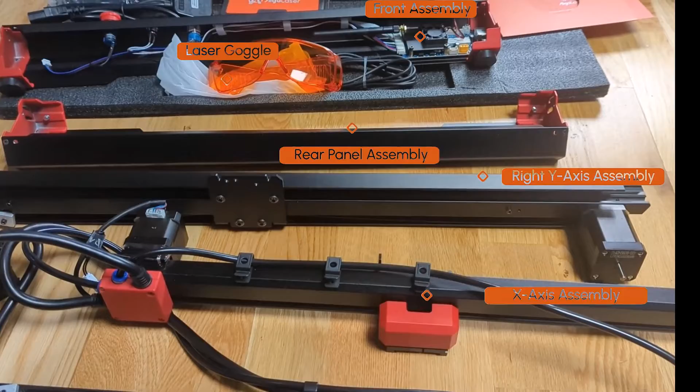And if I put all of the parts onto the floor, we can see exactly what was in the box here. We assemble the X and Y axis, the front and rear assembly to make our frame. There's some safety glasses that come with it there, the toolbox. And if we quickly stop here a moment, you can see the Wi-Fi aerial on the front assembly. That allows us to connect to the laser cutter by a smartphone. But more about the Wi-Fi connectivity later on.

And you can see an air pump there, that's because the laser cutter comes with air assist, which is a really good feature. We'll be looking at that later. We get given a pack of consumables, which give us something to get started using with the laser cutter. And last but not least, there's a good user manual.

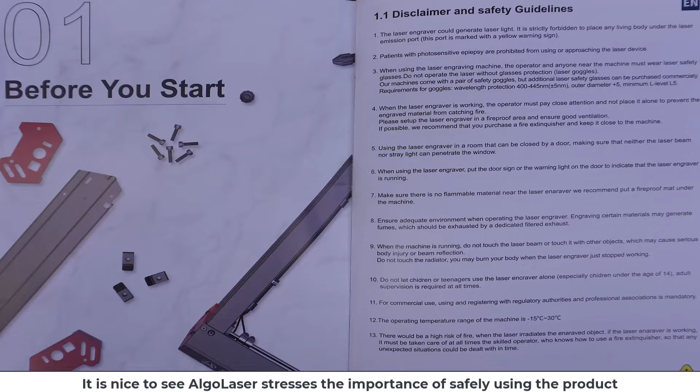And looking in the quick user guide, it's really nice to see that AlgoLaser has a really big emphasis on safety. I think this is really a responsible thing to do because apparently many companies, they just don't really care about safety. In fact, Maker's Muse made a video about it about a year ago, I think. I'll put a link in the description to that. But the gist of it is some companies are very irresponsible.

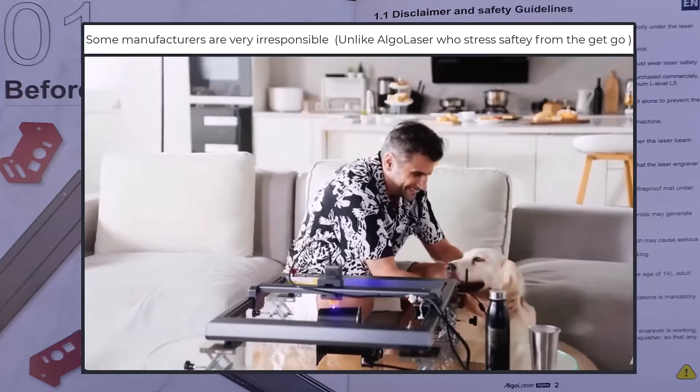For instance, I'm not sure which company this advert's from, but a snippet of it, we can see a dog right next to the laser cutter and the guy using it in his front room. And when we look at the AlgoLaser safety list here, we're going to see that's absolutely crazy.

So the first thing we see here in the safety guidelines is obviously not to have anything living underneath the laser. That goes without saying. But thinking about the video we just saw with the dog in the same room right next to the laser, should the laser beam be reflected off anything, well, it could actually hit anything in that room, including the man and his dog. Next safety point is people with photosensitive epilepsy.

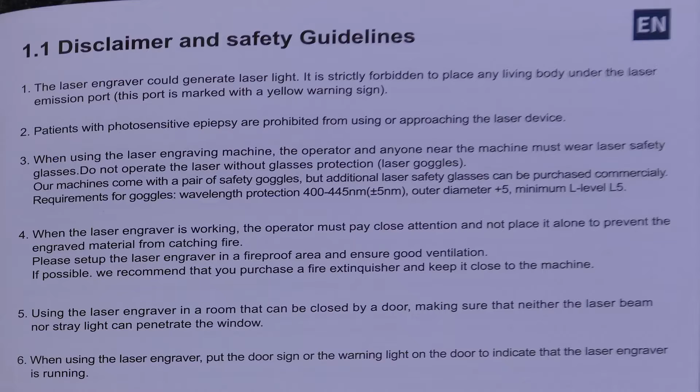The flashing lights could trigger a seizure, so they shouldn't use this laser cutter. And next, whenever you're looking at the actual laser cutter while it's working, you should always wear safety glasses. And the Alpha from AlgoLaser, it comes with its own set of laser safety glasses. But it's a really nice touch that they actually say the wavelength that you need to protect your eyes from in case you want to buy your own safety glasses, so you can be 100% sure that you're using glasses that are going to protect your eyes.

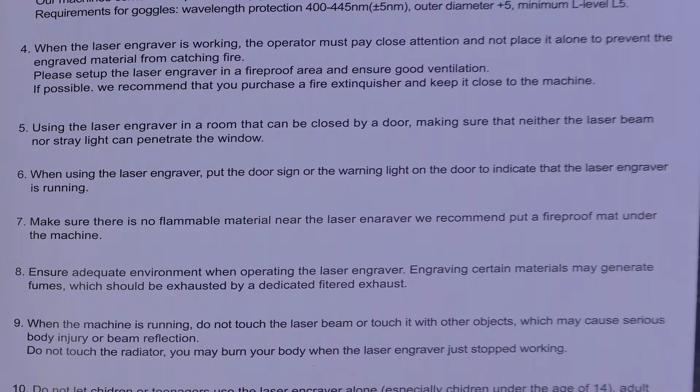Because without using glasses, should the laser go in your eye, even if it's just refracting off something or it reflects off something, well, you could pretty much instantly blind yourself. It can burn your retina out. So it's really, really important.

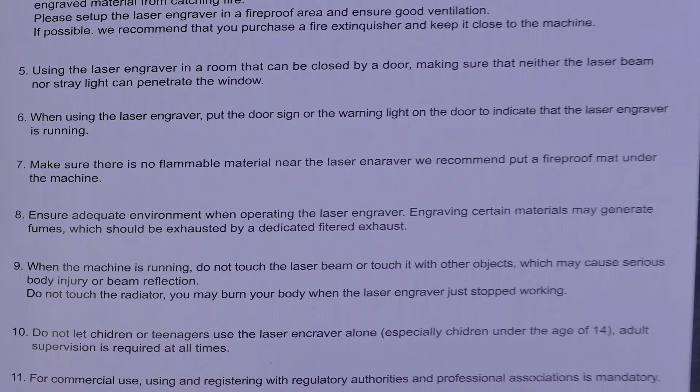Please protect your eyes. We can see here there's multiple warnings about fire hazards. You've got to be really careful about when you're laser cutting that things don't catch fire. You might be laser cutting wood, cardboard, anything really, so there's always a risk of fire. One thing the company recommend here is putting a fireproof mat under the machine.

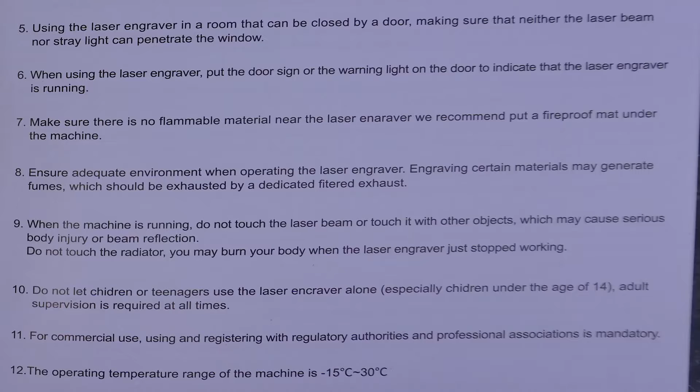That's something I'm going to be doing later, and maybe keeping a fire extinguisher nearby just in case. Because I found out it is actually pretty easy, if you're careless, to catch something on fire. I caught a piece of wood on fire by doing something a bit silly, which you'll see later on in the video.

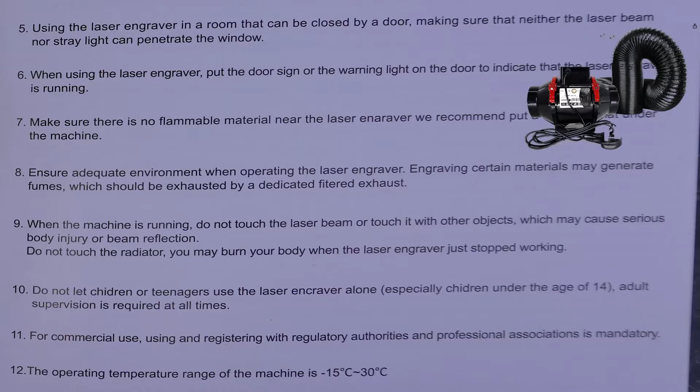Now as well, when you're cutting or engraving things, it's going to make fumes, and you really don't want to be breathing these in. So it's important to be using it in a well ventilated area. It's recommended that we should exhaust the fumes through a dedicated filtered exhaust. So that's something I'm going to be building before using the laser, because I really don't want to be breathing in any fumes, especially if they might be toxic.

Cutting wood and things like that is not going to be too bad, but some acrylics and fake leather, when you actually cut them, can give off toxic fumes. Apparently one such gas that can be given off cutting some things is called hydrogen chloride. Google it, it's really not nice if you're going to be breathing that in.

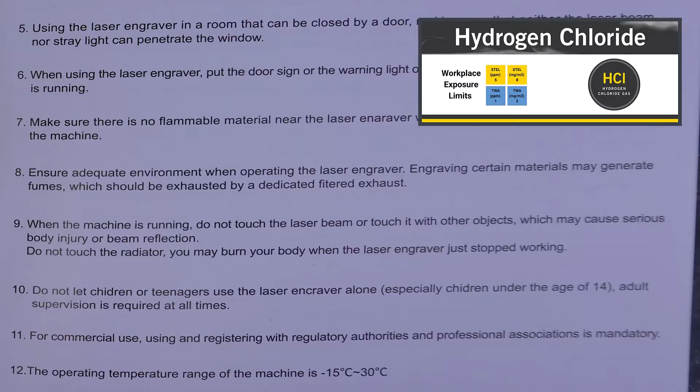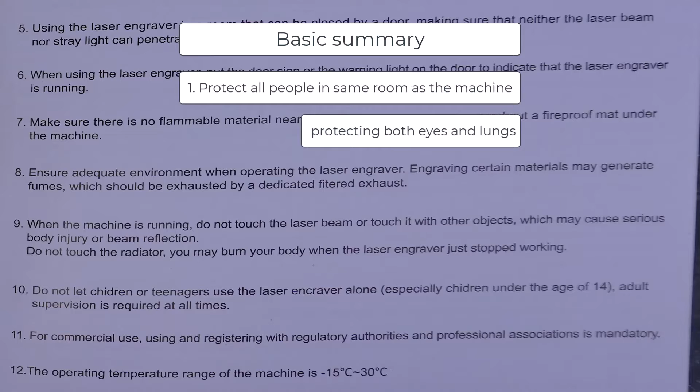So just to summarise the safety points: we need to protect both ourselves and anyone else who may come into the room, and that includes protecting our eyes and making sure we're not breathing in any fumes. And lastly, just making sure we're careful about cutting materials that may be able to catch fire.

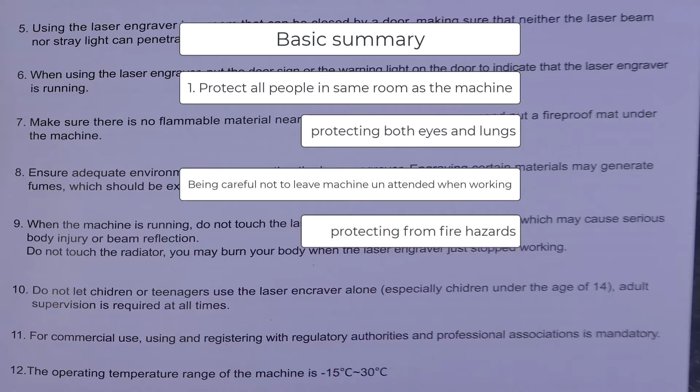We don't really want to be laser cutting and just leaving the machine unattended, but at the same time we don't want to be looking at the laser working all of the time either. So what I'm going to do is build an enclosure with a fireproof base, have an extraction system, and also rig up a small webcam and light so I can keep an eye on the laser cutter from my PC, without having to look at it directly.

So after I've built the laser cutter, which I'm going to do next, I'll then show you what I used and how I built my enclosure, all for about $150.

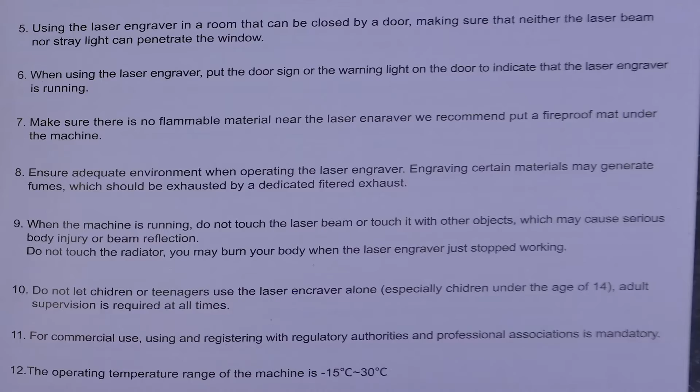Okay, so normally I don't really like putting things together, but this was actually remarkably easy. I just put all of the pieces on the table, and you can see I've got my laptop there too, because although the Alpha comes with a really clear instruction manual, I prefer to use AlgoLaser's video tutorial showing how to put it together.

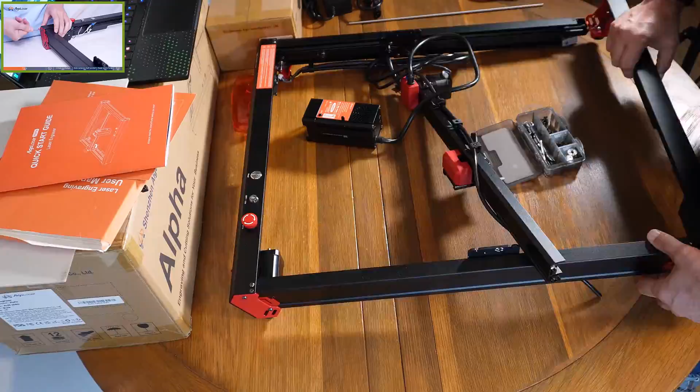Also, when building the machine, it comes with its own toolkit, so everything's included that you need to put this together. Like I said, it's remarkably easy to put together. You just basically bolt four sides together making a square, push a few little electrical socket connectors together, and connect the gantry, which is the part that the laser travels up and down on, across the frame.

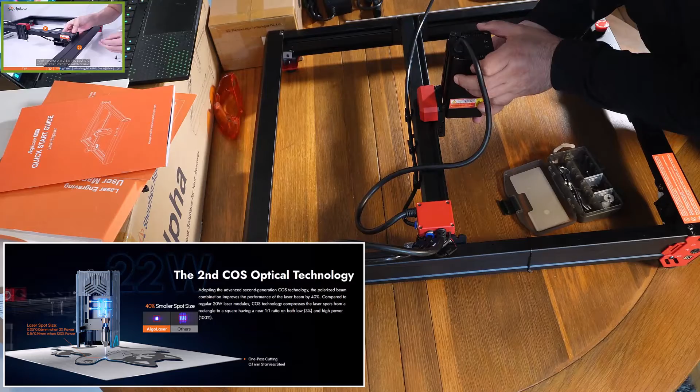Next, I'm installing the powerful 22 watt laser here, but it also has another trick up its sleeve, because the laser has a 40% smaller spot size, making it a perfect square 1:1 ratio, improving both power and cutting accuracy. And if you noticed, it was really easy when I fitted the laser in — I just slid it in and then locked it into place, but we'll be looking more at that later.

Up to this point the assembly had gone pretty well, but I'd made a mistake. I had the pipes on the inside of the frame instead of the outside, so I had to quickly undo a few bolts and adjust that.

So once I'd done that, everything else was pretty straightforward. You have to attach a metal bar going across which attaches to the motors, which moves the gantry up and down, so that's pretty straightforward.

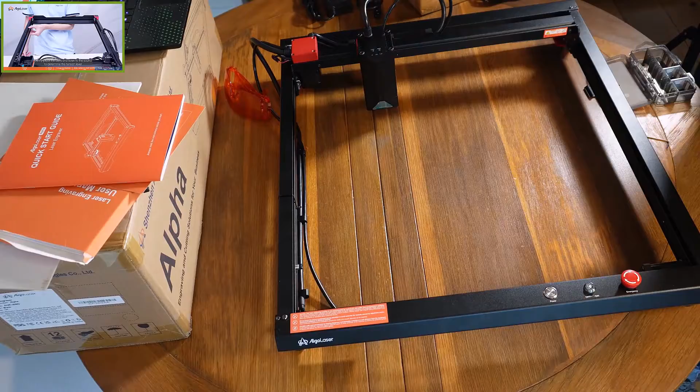So for me, the hardest part of assembling the machine was actually tightening the gantry belts. Either side there's a belt, and you have to tighten them exactly the same. The way they say you should do it is kind of twanging the belts, and both sounds on each side should sound the same — if not, you tighten one side and then the other till they both sound the same. But for me, I found this really difficult, though I'm not going to make you watch me struggling to do this.

It took me a little while, but eventually I got it right. So with that done, the machine's built.

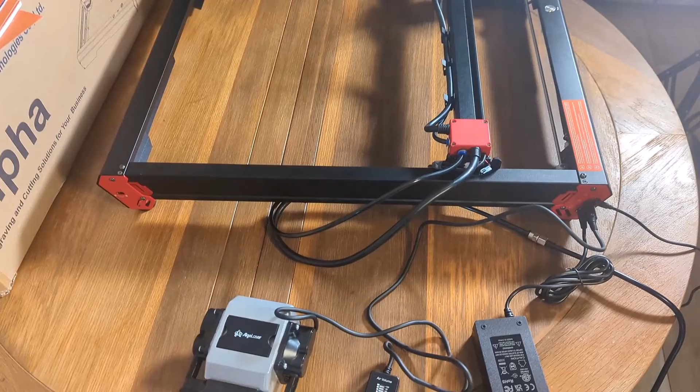The silver rectangular box on the left there, that's the air assist pump. It's nice because it doesn't need a separate power supply because it plugs into the frame and draws its power off there. At the side of the frame, at the top, that's the USB port that will connect to the PC. Underneath that is where the air assist draws power from the frame, and underneath that is where the main power supply that powers everything connects.

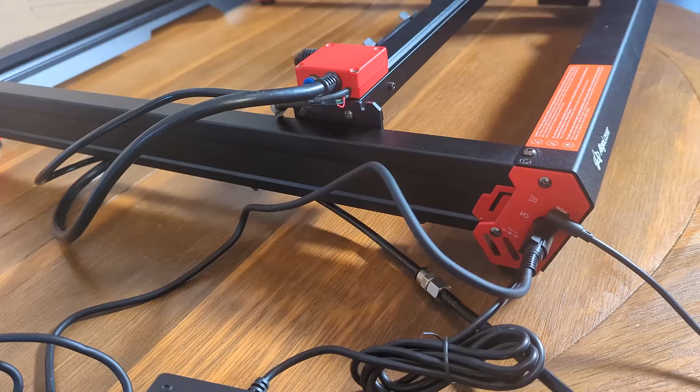Okay, so here's the finished product. There's everything put together. Now you can see I've put this on a piece of what's called cement board. This is totally fireproof, and what I'm going to do when I'm making my enclosure is cut this to size so the actual frame can sit on top of it.

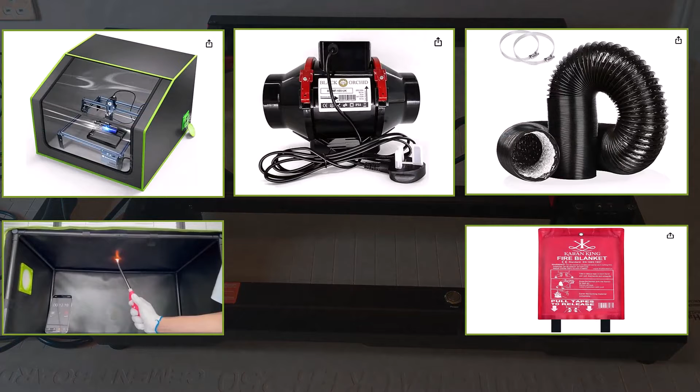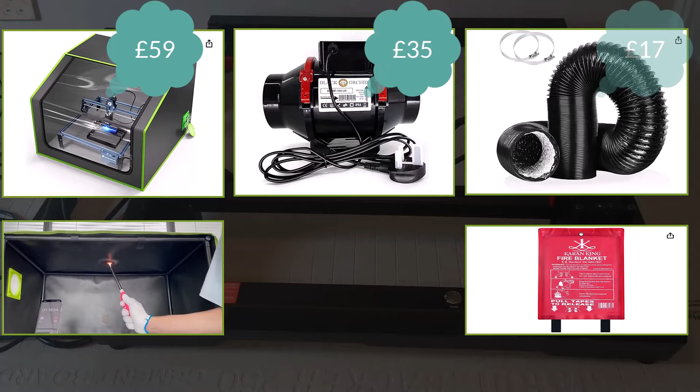So this is the equipment I bought to make sure I was doing my laser cutting safely. I bought a fireproof tent enclosure for laser cutters, which cost me £59. To extract the fumes from inside the tent, I bought a hydroponics fan for £35 and some 4-inch ducting, which was a further £17. Now I didn't buy a fire extinguisher, I bought this cheap £6 fire blanket instead.

So I assembled the frame of the tent, and then I cut 2 pieces of 5mm ply, just slightly bigger than the size of the frame. Next I drilled holes around the frame and cable tied it so it couldn't move, and also made a handle at the front with cable ties, which will make it easy to move the tent around by pulling it and sliding it along. Next I cut a piece of fireboard to the same size as the frame of the Alpha.

Next I needed to drill some holes in the side. This would allow me to put cables through and also allow airflow when the extraction's on. Now talking about extraction, if you don't want to have to put a pipe out the window, then you need a friend called Luke who's a builder, and ask him to cut a hole through the wall for you. Okay, so thank you Luke.

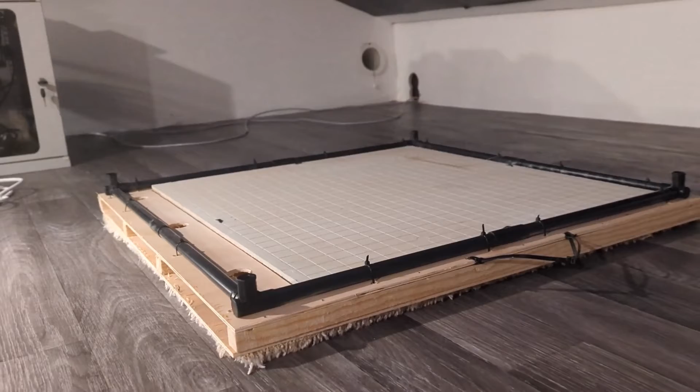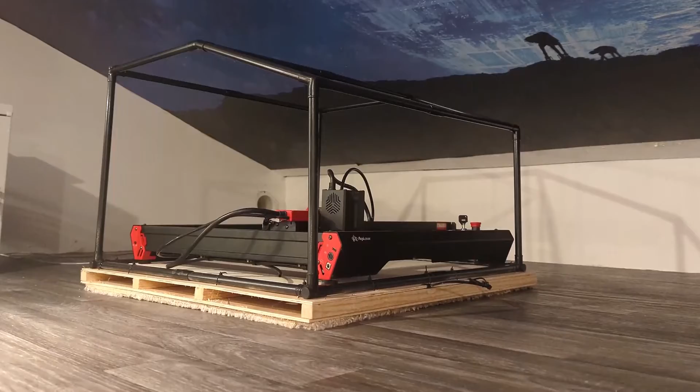So guys, you can see the extraction fan hole over in the corner there, and the base of the laser enclosure is finished now. You can see it's got the 2 pieces of wood with a gap in the middle. That means I can run cables underneath and don't have to have them go over the actual frame itself. So with the laser cutter back on and the tent frame rebuilt, you can see what this enclosure is going to look like. I stuck a piece of upside down carpet on the bottom to make it easy to pull around on the floor.

I needed to better monitor what's going on inside the enclosure when doing laser cutting. I already had a 1080p webcam lying around from a previous project, and I bought a USB ring light, and I thought if I can combine them together and stick it onto the frame, that's going to be the perfect solution. So I removed the base of the USB webcam and then stuck the webcam behind the actual ring light itself using a bit of hot glue.

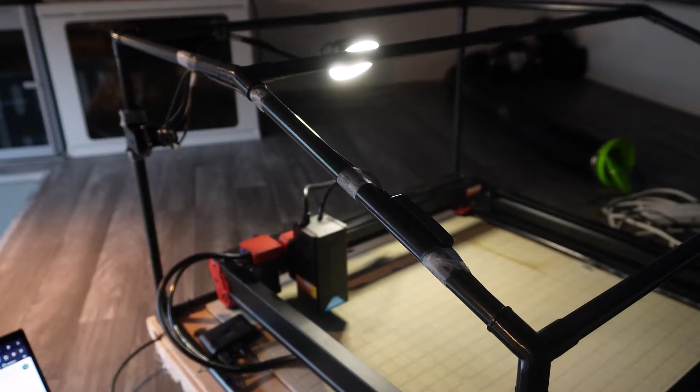Now I've finished making the camera and I've stuck it to the frame, and you can see the light shining down on the bed there. Now I'm testing it out here using Google Meet because that's the only way I could get the camera working on that laptop for some reason. And it's working absolutely fine.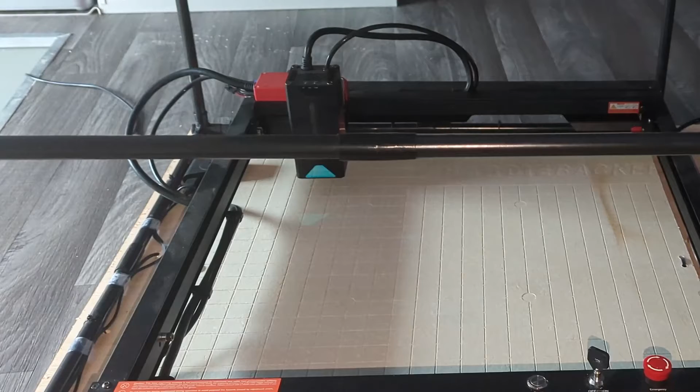Now you'll notice that everything's going into a USB hub. That way I can have the Alpha, the camera and the light all connected to the computer with just one cable. So that's the laser cutter enclosure all but finished. You can see on the back right hand side there's the air assist pump on its own little platform which is connected to the main platform.

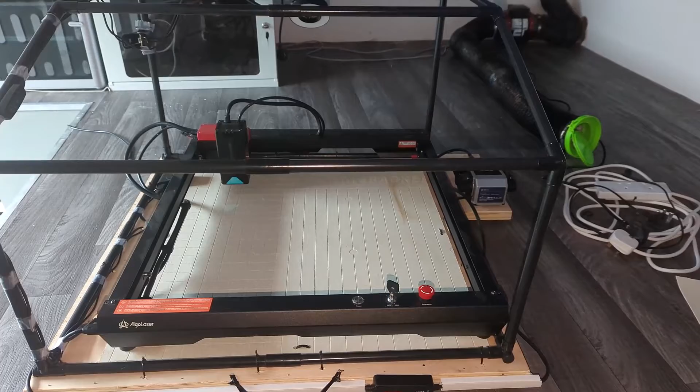So all I really need to do now is put the tent on and then connect that up to the extraction system. But before doing that, I want to show you some things that are going to be easier to show you without the tent on that I think make the Alpha a really cool laser cutter.

Now you probably realise, because I keep on going on about it a lot in the video, that I'm really impressed with the safety features of AlgoLaser, and we can see here the chrome looking power button, but next to that is a key which has to be in the on position in order for the laser to work.

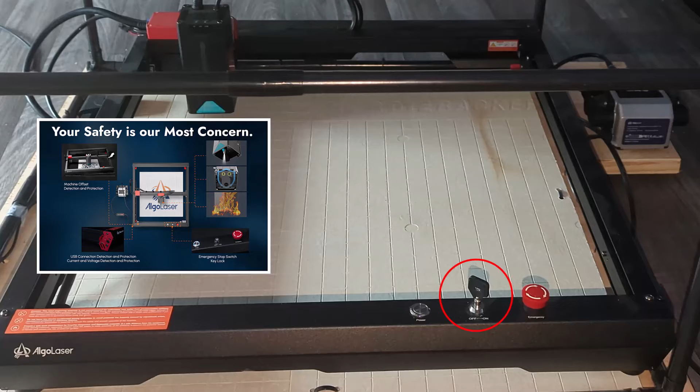So it's a nice feature that you can actually remove the key, so you can feel confident that no one who doesn't know what they're doing is going to use it if you're not there. And the button to the right of that red button is an emergency stop button. If you hit it, the whole machine stops, and to reset it you just turn it and it pops back up.

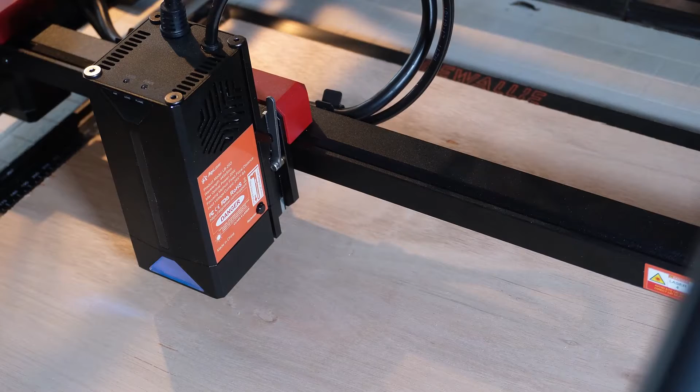Now I want to show you some really neat things about the Alpha's laser. The way you can adjust it is really cool. You just pull this little lever down and it moves up and down on like a track, and when you push the lever back up, it locks into place.

And this is cool, a removable magnetic laser shroud. It's a good safety feature and it's easy just to stick on.

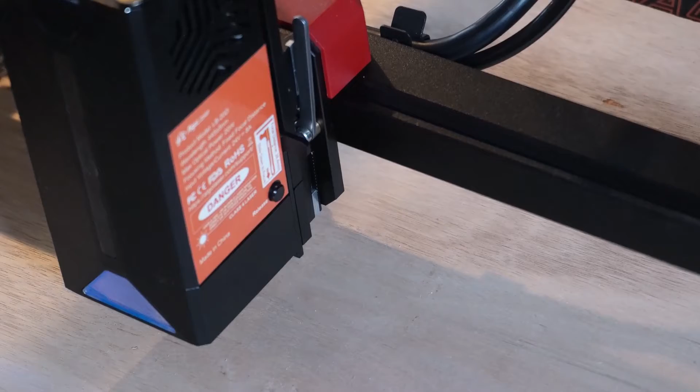When using a laser you have to focus it, getting the gap right between the actual laser and the material you're cutting. On the Alpha's laser there's a little black lever that pushes down and releases this little spike thing. We release the lever, which will then drop the laser unit down onto the material you want to cut onto, like that. Then you just lock the laser module back into position by moving the lever up to the top position, and press the black button here and the spike goes back up, and you've got the perfect distance between the laser module and the material you want to cut or engrave on.

So I've got to say that's a pretty cool feature, making setup and preparation really easy.

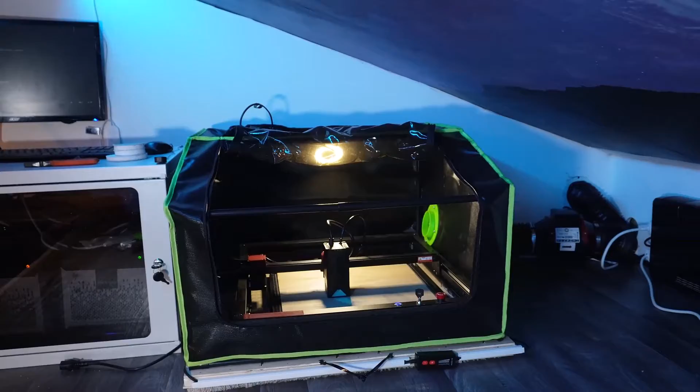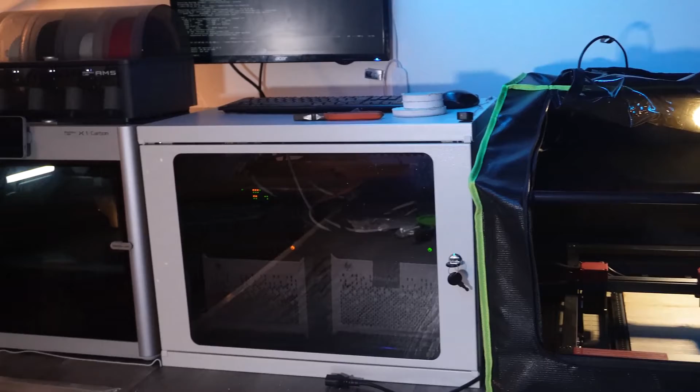So anyway, the enclosure's all finished, so I'm ready to be doing some cutting. The tent's on the enclosure, the camera and light are all working in there, and the extraction system is all connected and running as well. And the laser cutter is actually connected to one of these PCs, the one on the right hand side, which is one of my backup RAID servers.

It's running on a Windows VM, and in the VM it's using Lightburn software, which I'm using to control the laser cutter. Now there is also an app which we can put onto the phone that allows us to control the laser and send through files to cut and engrave from the phone. This app can be found on both Android and iOS, and you can see me here using the app to control the laser.

But to get the most out of any laser cutter, we really need to use proper software, and that's why I like to use Lightburn. So just what is Lightburn? Well, it's software used to control laser cutters and engravers. It provides a graphical interface to design, edit and send projects to the machine.

On Lightburn's website you can download a trial which lasts for 30 days, or you can purchase the software. We need the G-code one, which in the UK is £51. If you want to buy it cheaper, go across to AlgoLaser's website, where it's cheaper at £45, and we can get a further 5% discount if we subscribe, and we'll receive an email with a code that we can use to get a discount.

Now one thing I wanted to show you about the Lightburn software - I know a lot of us who use Unraid, we use VMs. Well, when I put in my key, Lightburn doesn't really like us running it in a VM. Is this the end of the world? Well, of course not, because we can actually email Lightburn and request VM activation. But I just thought I'd mention it because if you run out the trial and then buy it, you're going to have to wait for Lightburn to get back to you in order to activate it.

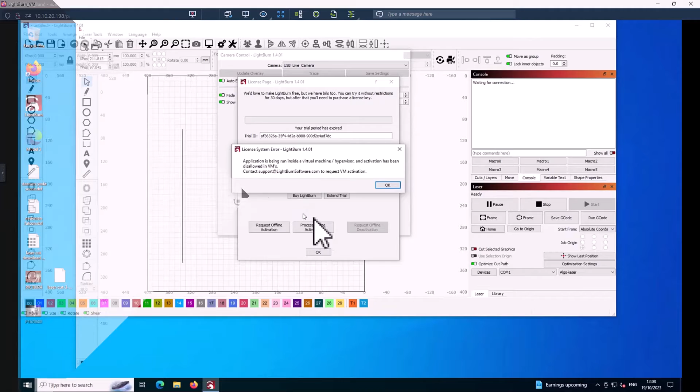Okay, so now it's time to move on and actually do some work with the Algo, and I'm going to do some engraving. I want to cut out this Star Wars AT-AT walker here, and I'm setting this to be black paint on white because I want the actual AT-AT to be burnt into the wood. Now in the top right in Lightburn, under cuts and layers, you can see the image.

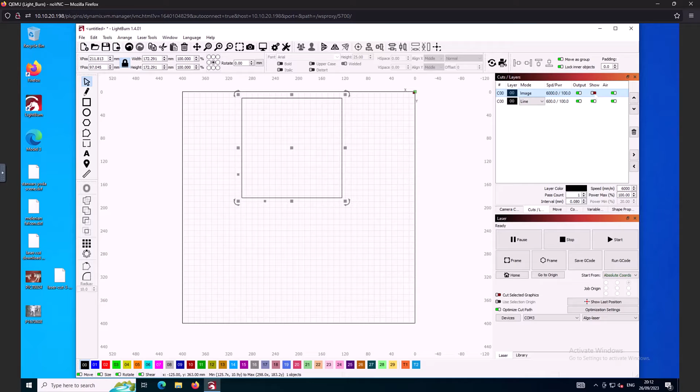I've set it to engrave at 6000 millimeters per minute and at 100% power. Now if I turn this layer off for a moment so we can't see it, you'll see underneath there's another layer, just a square, where I'm going to cut a line which will cut out this design from the wood. This I've got running at 600 millimeters per minute at 100% power, so that will easily cut through the 3mm ply I'm actually engraving this image onto.

Okay, so now the alpha is just cutting around the edge of the image to make it a square. Let's take it off the bed and have a look up close at what it now looks like. Yes, that looks pretty good I think. The alpha's done a really nice job. The detail is fine and the image looks really sharp.

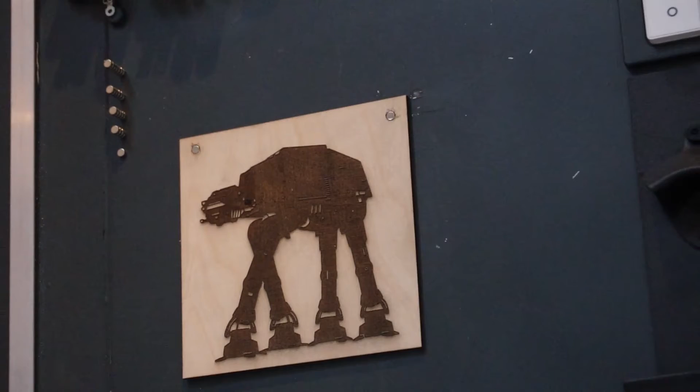Now I tried to put some little magnets into this, as you can see, and accidentally drilled right through the whole piece of wood. I should have really engraved this on a thicker piece of wood, so if the camera will stay in focus I'm going to try and show you this a little bit closer up. Yeah, it really is a shame about those magnets when I drilled through the whole board, but never mind.

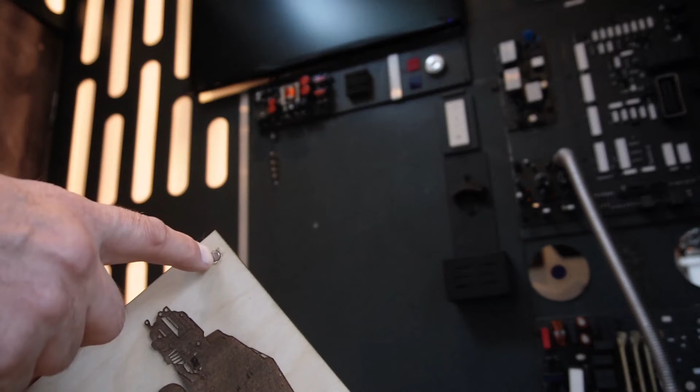I should really have used maybe a 10mm piece of wood, like I made this little Space Invader character out of. You can see here it's cut through that 10mm ply really easily. Although to be honest I could have cut this a lot faster, because you can see on the bottom of the wood I've burnt it a little bit from having it going too slow. But at least the magnets stuck in without being shown through the front.

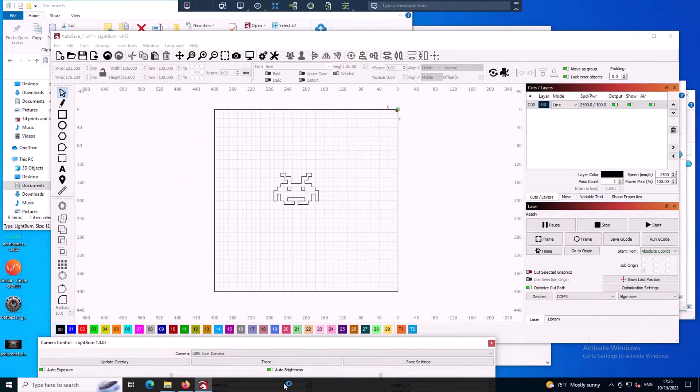So let's go back in time and have a look at me cutting out that little Space Invader in the 10mm ply. You can see the piece of ply on top of another scrap piece of wood I've got here. Now I did that because I wanted to draw a square so I knew exactly where to place the piece of wood so I could cut through it. But really I shouldn't have put it directly onto another piece of wood. I think that contributed to the burning we saw earlier when I showed you the Space Invader figure.

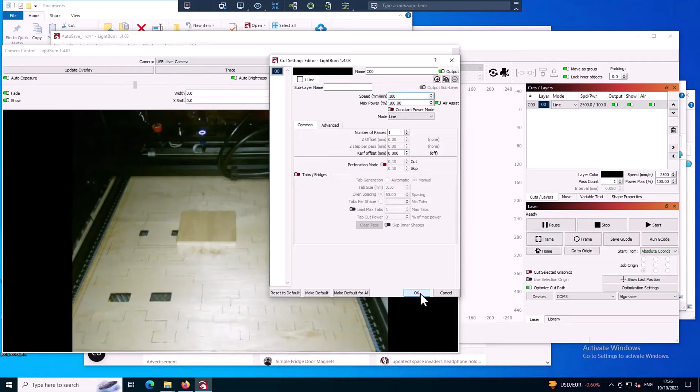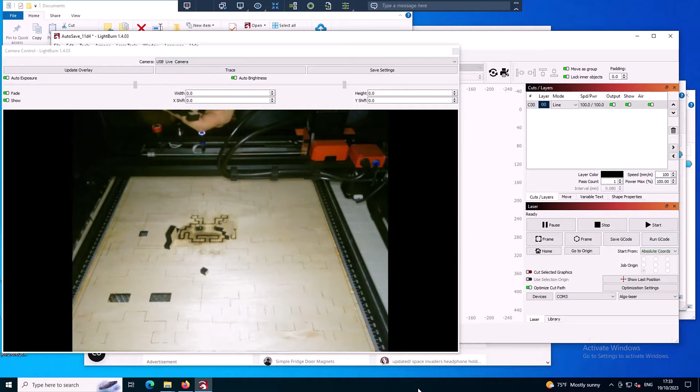But also I think I should have cut it a little bit faster than the 100mm a minute that I had it set at. But anyway, the alpha cut through that 10mm ply with ease in one pass, no problem at all. And AlgoLaser say that it will actually cut through 12mm ply in one go, and I think they're definitely right, because look, it's burnt right into the wood underneath, so I think we can be sure that 12mm ply would cut in one pass as well.

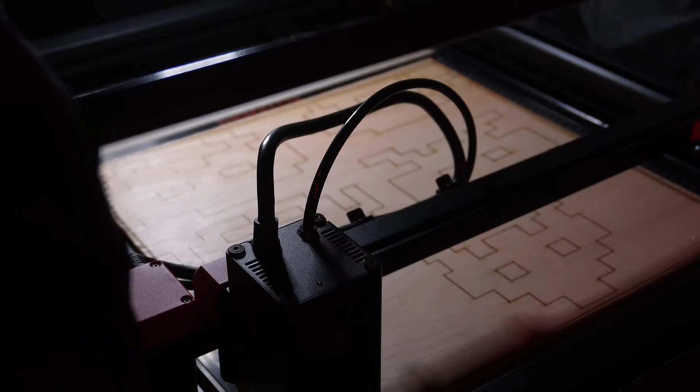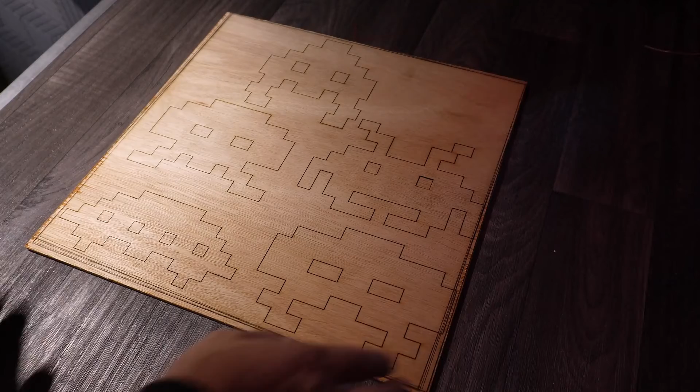Now you may be wondering why this piece of 5mm 400x400 ply here on the bed of the laser cutter has these Space Invaders kind of engraved into it. Well, that's because I wanted to cut out some large Space Invaders through the 5mm hardwood ply, but I tried cutting it too fast and it didn't quite go through the wood. I was cutting at 650mm per minute and 100% power, but it didn't quite go all the way through.

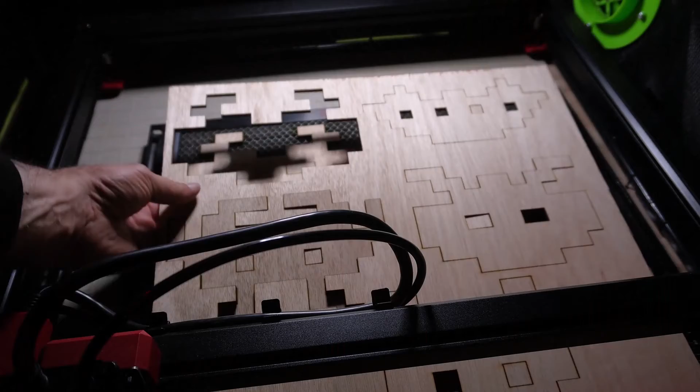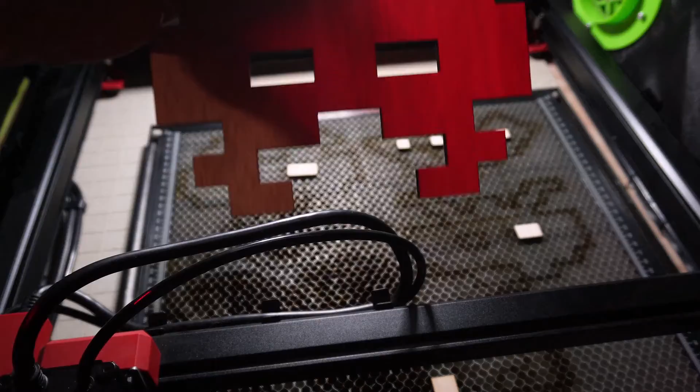On some parts, like the eyes of some of the Space Invaders, I could actually push the eyes through, they were cut through okay. So I cut it again on a new piece of wood. This time I ran it at 500mm per minute, 100% power, and as you can see here, as I picked it up everything fell out, everything was cut absolutely perfectly. Look at that, really clean lines. I think it's a real testament to what the AlgoLaser Alpha can actually do.

Those Space Invaders have come out absolutely perfectly, no burns on either side of the wood, the air assist of the Algo really makes a difference when you're cutting. I think these Space Invaders have come out pretty much perfect. So the board that didn't cut quite through all the way I used as basically a scrap piece of wood, finding it useful to actually burn a mark onto the wood so I could work out exactly where I wanted to place things.

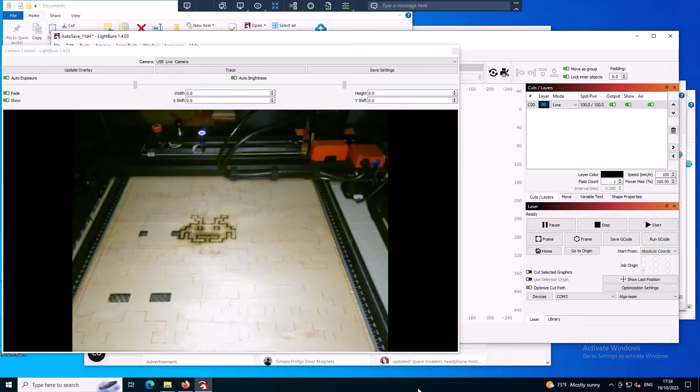So I'd had good success with using the laser on wood, and I wanted to actually try cutting quite a thick piece of acrylic. I wanted to try cutting a 10mm piece.

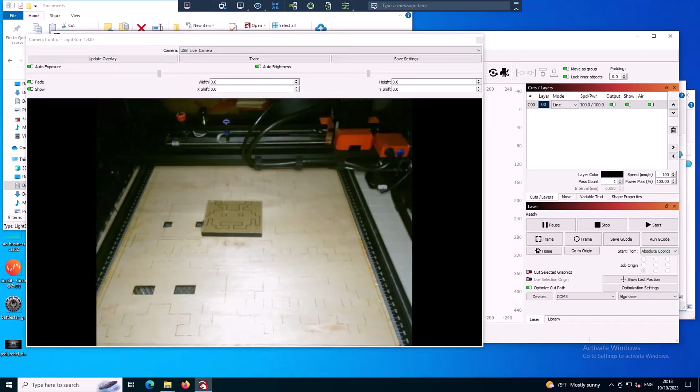Now I was hoping to cut out another Space Invader figure in the acrylic, but what I found is when I tried to do that, acrylic kind of melts. If I tried to cut a pattern out from the middle of a piece of acrylic, when it cooled down it would just stick back together and I couldn't push the piece actually out.

So this is no fault of the laser cutter itself, it's just when trying to cut through a thick piece of acrylic, as it cools down, the part you're trying to cut out can actually bond back to the actual material. So I thought I'd try again, but this time...

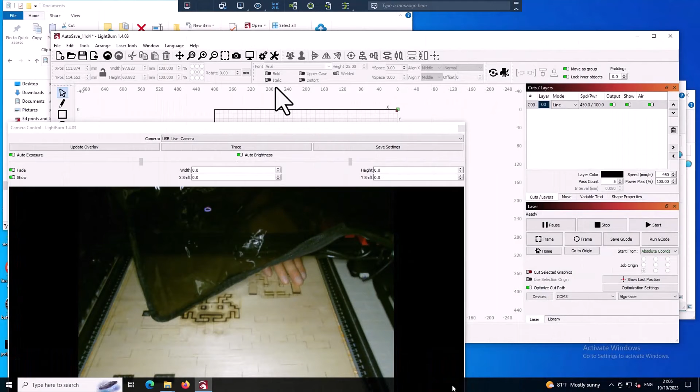...raising the acrylic up on a couple of wooden blocks, and this time cutting a semicircle on the edge of the acrylic to minimise it being able to stick once it's cut through with the laser. Now I didn't get through in one pass, it actually took 5 passes, but as you can see here it did cut the semicircle out fine and it separated from the actual acrylic.

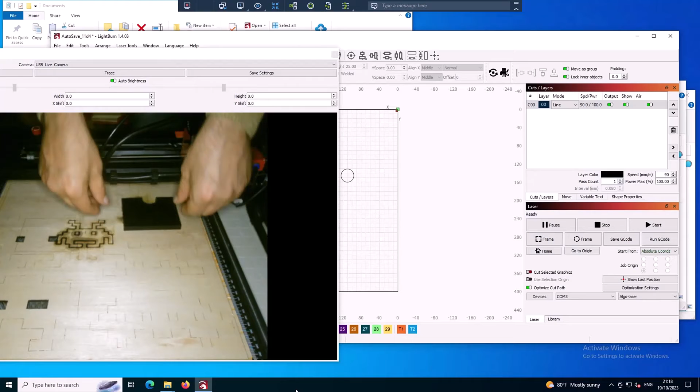Okay, so the next thing I tried, I probably really shouldn't have tried, but I really wanted to try and cut a circle in the middle of the acrylic and see if I could make it just push out. So my flawed plan was just to keep cutting a circle, multiple passes at a slow speed, again and again, until the actual circle fell out.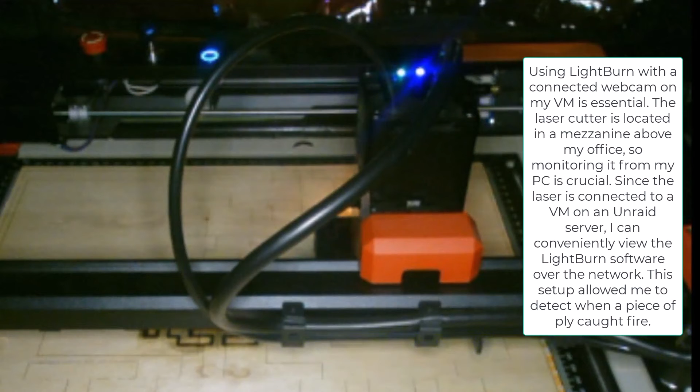Now if you remember earlier in the video, I said that I managed to catch something on fire. Well, this is when I did that. And so what happened, because I was cutting so slowly and so many passes at 100% power, the wood underneath ended up getting hot and an ember formed and it burst into flames onto the wood.

So I got my fire blanket straight away and put out the fire. But I think this proves really why it's really important to make sure you keep an eye on your laser cutter at all times and have some kind of fire precaution in case something happens like it did for me.

But I tell you, I was really glad that I had that webcam set up that looks inside the enclosure so I could keep an eye on it all the time when I'm working on my PC. Anyway, that was the end of my scrap piece of wood. I had to obviously throw that piece away and replace it with a fresh one.

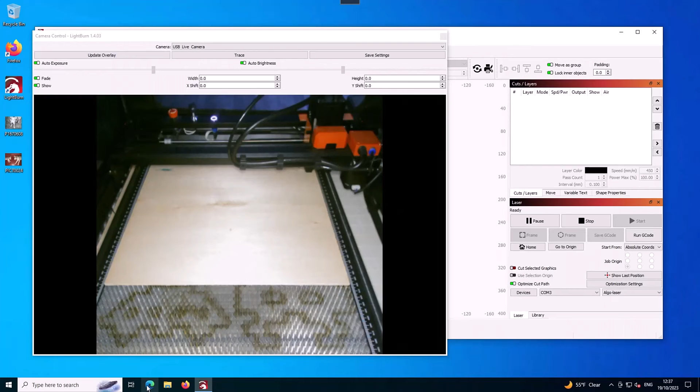Okay, so now what I wanted to do is actually try and engrave onto some powder coated cards. So I've got a powder coated metal business card. So what I'm going to do is I'm going to draw a square and mark the wood the same size as the business card, and then I'm going to place the business card on there and engrave onto the powder coated card.

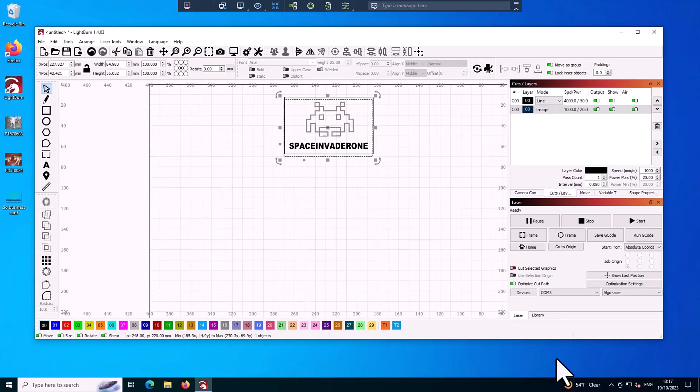So how this works is we run the laser over the card at a high speed, which burns off the powder coated paint, exposing the metal underneath, giving a really nice effect. And so here's the finished product. Looks pretty nice, I think. I really like the way we can engrave a design easily onto a metal surface.

So in an upcoming video, I'm actually rebuilding my Unraid server into a new 24 bay case. And I'm going to be using the AlgoLaser Alpha to actually engrave a really nice design into the top of my case. But you're going to have to wait until that video comes out.

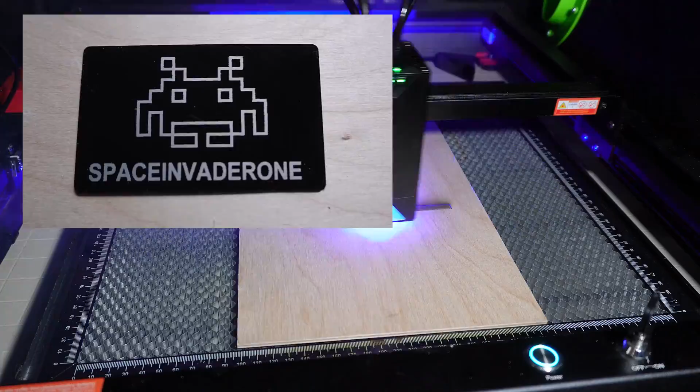But for now, what's my opinion on this laser cutter? Well, to be honest, I've had a whole bunch of fun with this cutter. I think it's a really great machine. Now, as I said at the beginning of this video, I don't have a great deal of experience with this kind of machine, and I've been pretty much learning on the job. But from the standpoint of someone who's never used a laser cutter before, I've found this machine absolutely excellent.

The build quality I think is excellent. It has a really powerful laser. I really like the way you can actually lift the module up and down easily with the locking handle, as I mentioned earlier in the video. And it does a great job at both engraving and cutting.